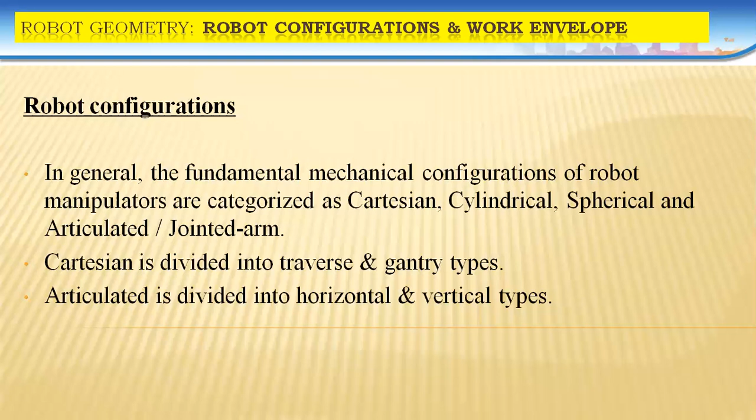The Cartesian coordinate system is again subdivided into traverse and gantry type of systems. The articulated or jointed arm coordinate system is further classified into 2 groups: first one is vertical movement and then horizontal movement types. Let me check out individually each and every configuration, and upon exercising the robot in each configuration, what will be its individual work envelope.

So here is a clear-cut definition of the workspace or work envelope: the extreme positions of the robot axes describing a boundary for the region in which the robot operates. So when the robot is in complete extension up to the end effector, we'll be considering the end effector as a major.

And the work or the movements that have been exercised by this end effector within the axis, or else surrounding its entire 360 degrees of its environment, lead to the work envelope, and the limits can be set with respect to its configurations.

For example, in the Cartesian coordinate system, only the extension of the positions will be taking place, limited to a particular height or particular length of its movements in different axes.

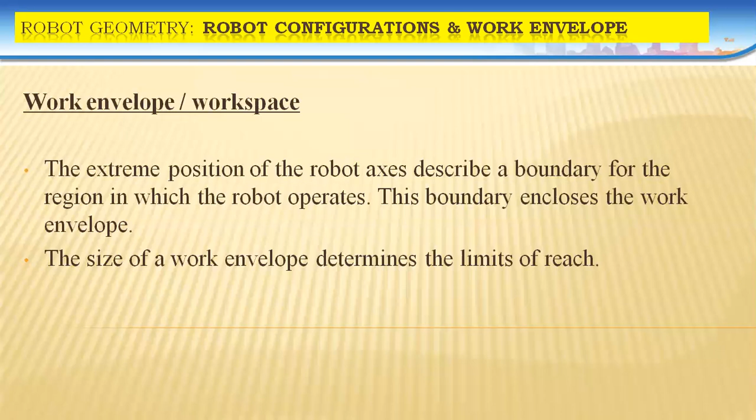And at that particular position, the heights and the extensions will vary when compared to the Cartesian type of coordinate system. Coming to the in-depth look at each type of coordinate system, the first one we are discussing is the Cartesian or rectangular type of robot.

It has 3 prismatic joints, as we have discussed, whose axes coincide with a Cartesian coordinate system. So Cartesian is x, y, z, 3 mutually perpendicular axes. And most of these robots come as gantries, which are referred to with respect to the frame structure supporting the linear axes. Linear axes in the sense of the standard axes x, y, and z. So mutually perpendicular axes. And overall the values are the robot's position within the frame.

If it is 2-dimensional, the XY frame will be taken, or else the YZ frame, or else the ZX plane will be considered, and it will have only two values as per these axes. And globally, if the object has been identified in three dimensions, the end effector will be referred with respect to X, Y, and Z.

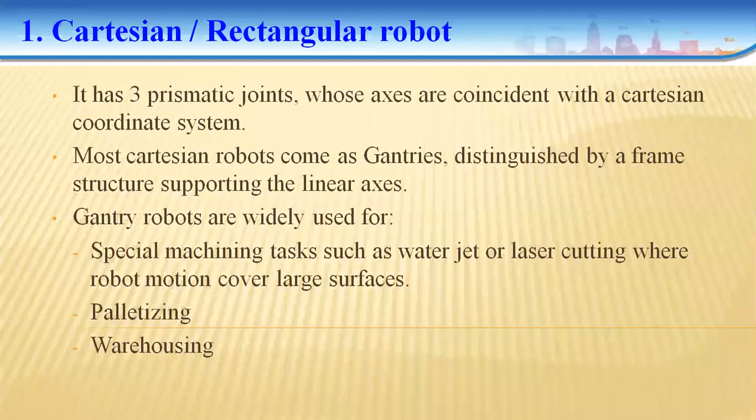And basically, we need to keep in mind that Cartesian relates to X, Y, Z. And what types of movements are possible in this coordinate system? Three prismatic joints only. So how many joints are there in the Cartesian coordinate system? Three prismatic type joints. So we'll have a detailed look with respect to the working axes also.

This is the Cartesian coordinate system robot. This is the X direction, positive X, negative X, positive Z and negative Z, positive Y and negative Y, mutually perpendicular. See, this is one direction, this is another direction, completely perpendicular to X, and along with it, Z is mutually perpendicular to X and Y.

Right? So regarding the working aspect, if you clearly observe, this is link 1, this is link 2, and this is link 3. Three different movements exist, and one link supports another link for its sliding actions. If you clearly observe here, link 1 is a supporting edge to slide link 2, which is also holding link 3 and the end effector.

And coming to link 2, from the bottom dead center up to the top dead center, that is towards the positive Z axis, the movement will be considered. So one direction of movement is considered to raise to a particular elevation or height level.

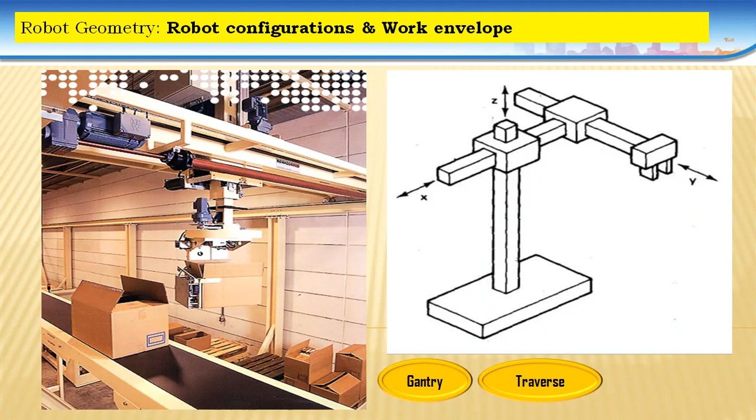That's the best example. If you consider the workspace or work envelope of the Cartesian type of coordinate system, this is the complete extension mode. Link 1 is completely extended along the z-axis, link 2 is completely extended towards positive x, and link 3 is completely extended in the y direction. So at the complete extension position, the end effector position and its surrounding space are occupied, a rectangular space.

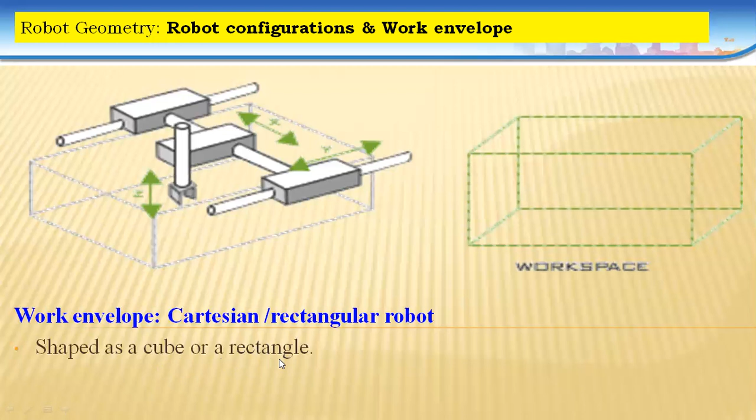What is the shape of the workspace obtained in the case of the Cartesian coordinate system? What is the shape of the work envelope, work volume, or workspace for the Cartesian type of coordinate system? We have to write a cube or a rectangle, based upon its movement. So your option will be either a cube or rectangle. This is the 3D orientation of its work volume.

Coming to the second type of classification, the cylindrical type of robot. In cylindrical movements, we have two linear movements, in either the xy, yz, or zx plane, and one rotary motion. So here the robot's manipulator has one rotational degree of freedom and two translational or prismatic movements, and the degrees of freedom are calculated based upon its movements.

If you have considered both the positive and the negative, obviously in three-dimensional strategy we'll be having 6 degrees of freedom as standard, and if any more degrees of freedom are given, it will be getting changed based upon its working environment. Degrees of freedom will be getting changed completely.

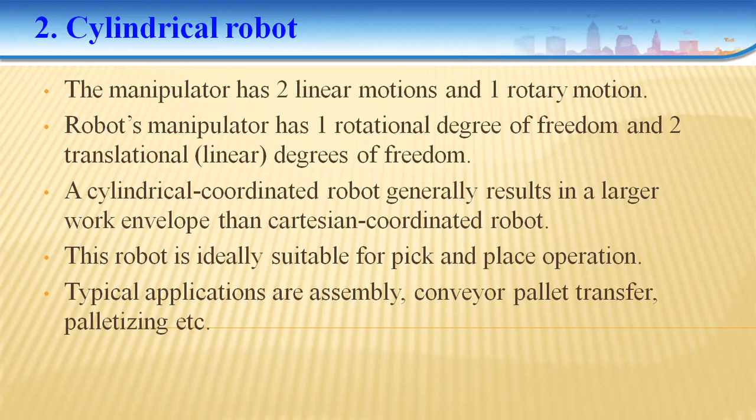What are the different applications for this cylindrical type of robot? Conveyor belt system is a good application, and palletizing. So palletizing and conveyor belt - we'll be seeing the conveyor belt example also.

So it's a sliding motion. In cylindrical coordinate system, we have characterized two prismatic joints plus one rotatory type of joint taking place.

Consider here, first one sliding on link one - that is the first prismatic movement. Second one is extension or contraction over link two. Link three is a piston and cylinder arrangement format - this piston extends and contracts its position relative to link two. So link three is an extension and contraction, and hence the end effector will be taking place here. So three different motions: one rotatory motion, and two prismatic motions are considered.

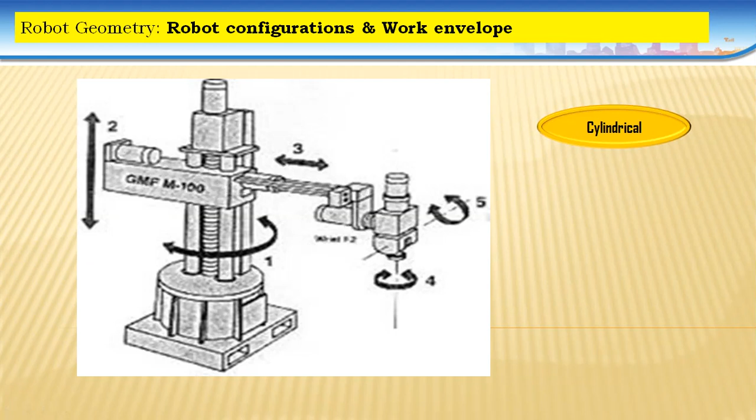Coming to the work volume related to the cylindrical type of robot. See the space that will be occupied - here the rotational base will be existing with base rotation, and extension towards a particular height from bottom dead center to top dead center. Next, the extension will increase its work volume in both positive and negative directions - bottom dead center to top dead center for one prismatic, and from here extension in an opposite direction completely.

So another axis is coming into force - considering the y-axis and x-axis extension. Hence two directions, two prismatic movements have been achieved, and one rotatory aspect.

Based upon this, link 1 will be rotating. Link 2 is having the sliding motion, link 3 is having the sliding motion, and link 1 will be having the rotatory motion. If link 1 is rotated towards 30 degrees, obviously this entire link 2 and link 3, attached to link 1, also rotates to 30 degrees. Hence this position will be rotating to 30 degrees and the entire position will be like this.

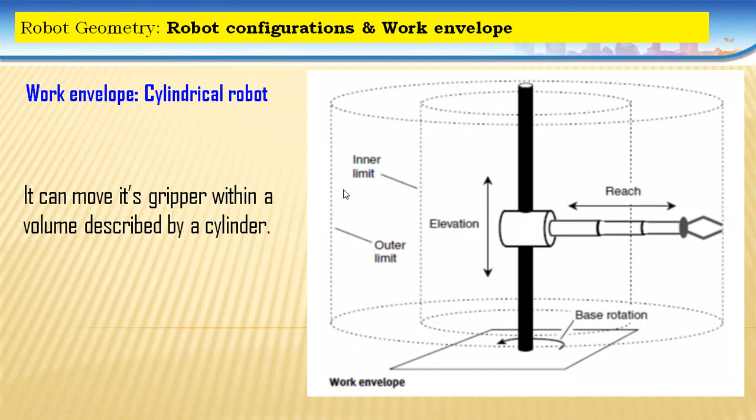Cylindrical motion is the traced motion. That is the major concept. Here also you need to consider that in the case of two prismatic and one rotatory kind of joints, upon its motion, what is the type of trace identified as an output? Either it may be cylindrical, Cartesian, or articulate. So you need to specify that cylindrical trace will be generated in its work volume.

Coming to the third coordinate system, that is the spherical coordinate system, or polar coordinate system. This is another type of coordinate system utilized in the industrial sector for robots, which will consist of only one linear motion and two rotatory motions.

In this rotatory motion we will be having either inclinational factors or revolutionary concepts. The first motion corresponds to the base rotation, that is link 1, which will be rotating clockwise or counterclockwise. The second motion will be the elbow rotation, which is a rotatory motion clockwise or counterclockwise around theta.

Here in the diagram it is clearly specified. This is the first joint, this is the second joint, and this is the third joint. The theta is a pin type of joint which will be rotated in its inclination at a fixed axis, so elevation can increase or decrease.

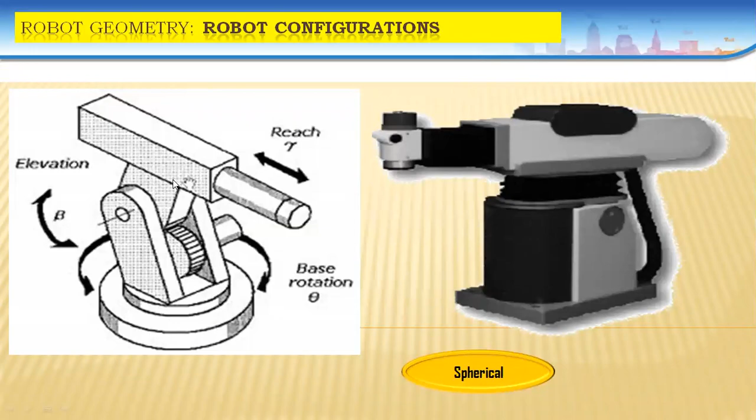See, verify here. That is mounted on the base. So first rotatory, base rotatory, and the second one is also increasing its elevation, beta in beta degrees.

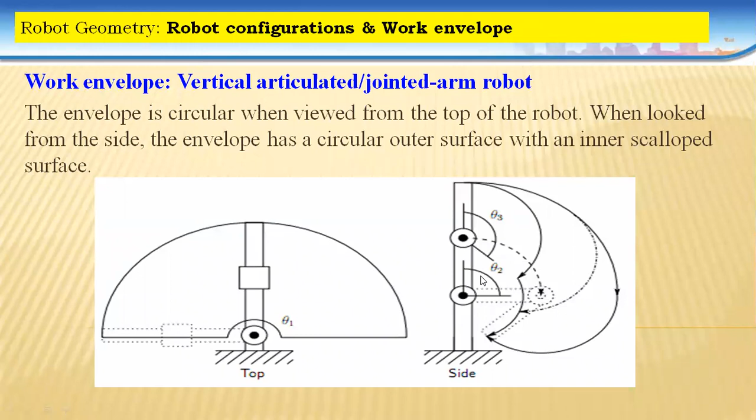Coming to link 2 and link 3, link 2 is a rotatory joint, link 3 is also a rotatory joint. Elevation increases or decreases, this is the theta 2 variation. This is theta 1 first, this is theta 2 second, and this is theta 3 for the third. So all 3 different joints are also rotatory type joints.

Coming to the point of this horizontal kind. This is a special case of robot utilized in some working units, that even though it is an articulated type of robot, in this horizontal condition, this articulated kind of robot is again subclassified into 2 types.

First one is the vertical mode. So this is vertical mode. In vertical mode, all 3 joints are rotatory joints.

Coming to articulated or jointed kind of robots, in that subclassification, the second type is horizontal type. This is a special type of articulated robot, having 1 linear joint and 2 rotatory joints, which is similarly equal to the

polar coordinate system. That's a spherical type of coordinate system, right? Spherical type of coordinate system. Third one, polar or spherical.

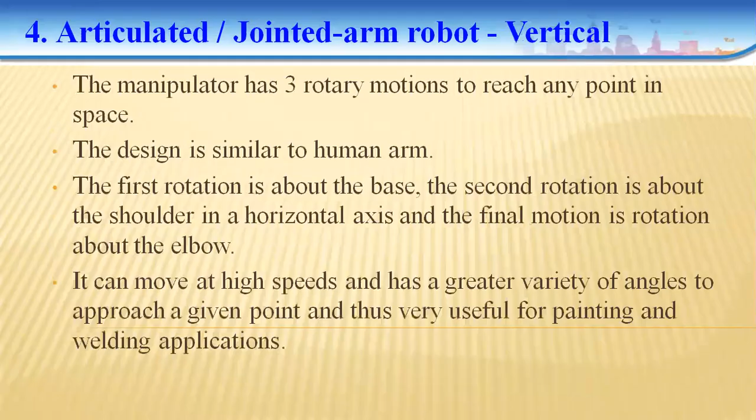Just let's have a detailed look by sliding the slides back. This is the spherical and polar. In spherical, we discussed clearly that one manipulator is spherical or polar, one is a linear type of motion joint, and 2 are rotatory type joints.

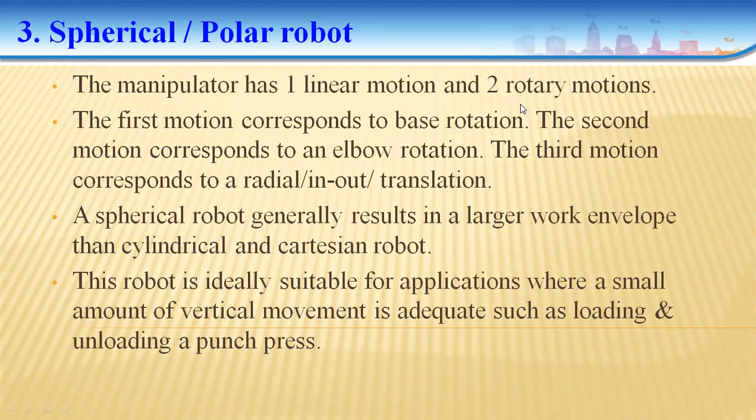Simultaneously, in this articulated case, the horizontal will be having two rotatory motions and one sliding motion, which will be equivalent in its operation with respect to polar type of coordinate systems. Also, another name for this articulated system is a SCARA robot.

What is meant by SCARA? Selective Compliance Assembly Robot Arm. So here robot arm in the sense each and every link we need to select. So that links assembly will be of our choice depending upon the work it has to perform in the industry. Whatever type of work it has to perform, based upon that design we will have the assembly with different linkages, by selecting the type of joints based on the output work.

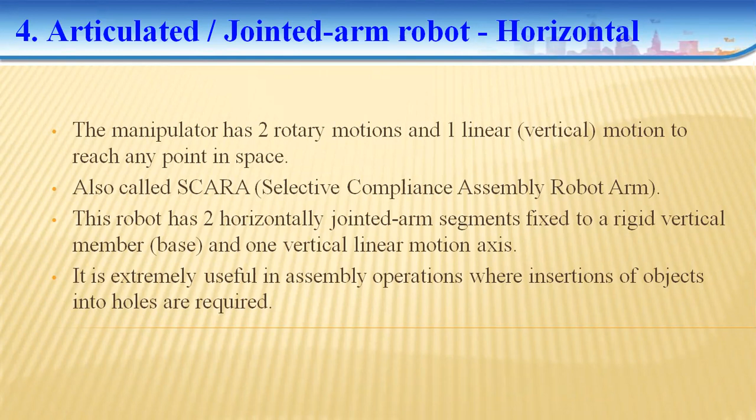Here, if you observe this clearly, see, this is the best example. Initially, the position is like this. So contracting and extension. Here, this is the base, first rotatory joint, and this is link 2, the second rotatory joint here, and this is link 3, right? It will be having the extended position towards this. There are sliding actions being considered in the case of this one.

First one, the link is a rotatory link. Second one is also a rotatory type of joint. And in link 3, we are having the sliding movements, towards the negative y-axis and towards the positive y-axis. And this object, upon rotation of this entire equipment, will be sliding to another position. That work envelope also we will be verifying now.

And to pick the object from a certain elevation, the extension will be taking place, and after holding the object, again it will be coming to the contact point. Those are the actions considered in the case of this articulated kind of robot, particularly the horizontal kind. The type of joint will be varying. We have to remember this. In 1 mark bits also they will be clearly asking these type of questions.

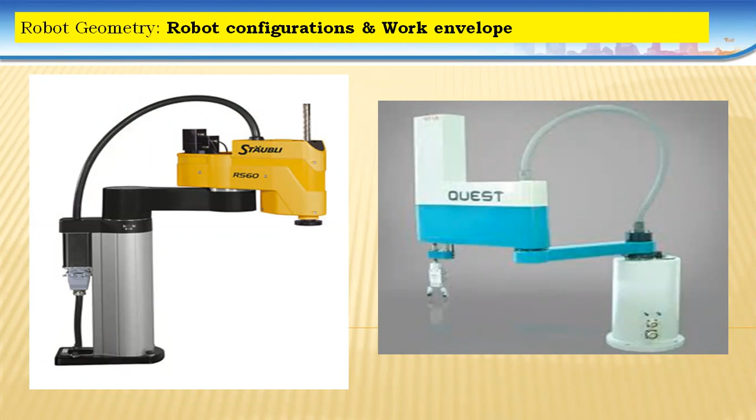So 2 rotatory and 1, sorry, 1 prismatic joint will be existing in the case of articulated kind of robot, especially in the horizontal mode. In the vertical mode of articulated joints, the best example is our crane, which we visualize in our daily life. 3 rotatory type of joints in the case of vertical mode. Right? You have to clearly verify.

See, Cartesian coordinates are on x, y, z basis, and in cylindrical coordinates there is one rotatory joint and 2 prismatic joints: base rotation, and next reach and height. In spherical coordinate systems, this is completely vertical. Here we will be having a theta orientation, 1 prismatic movement and beta orientation. So 2 rotatory joints and 1 prismatic joint in the spherical coordinates.

And in articulated there are again 2 different conditions, vertical and horizontal. In the vertical condition, rotatory theta, again rotatory beta, again rotatory gamma. In horizontal it will be equal to the spherical coordinate: first there is theta, next again a rotation, and the third one is prismatic along x or y. Clear? You have to clearly remember this, right?

Next, based upon its movements, these are the advantages and disadvantages related to it. Right? There is a basic difference between these. Okay? And these are the different types of classifications existing in the robot.